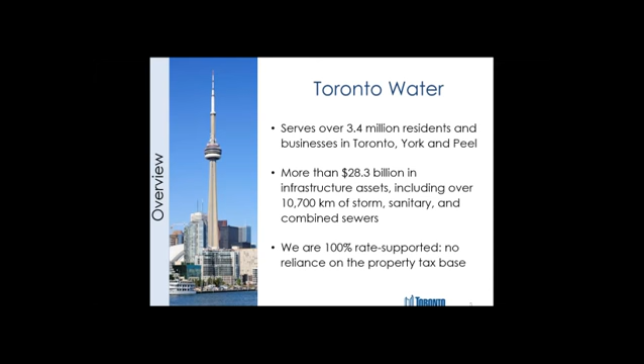Because we're so large, because we're trying to do so many things, that brings in some challenges with competing interests. The city's getting older, so we have an aging infrastructure backlog, what we call our state of good repair backlog, at about $1.6 billion now. We also have a lot of growth in the City of Toronto, so how do we upgrade our systems to handle population growth? We have increasing environmental goals around water quality, our rivers, our lakes, and for our residents. And we also have climate change as a factor influencing our decisions and the level of urban flooding.

So I want to jump into why did we create the Basement Flooding Protection Program, and I think that's an important question when we look at ourselves as a city. Why do we have that? It really comes down to we've had a number of large storms over the last 15 or so years, and the magnitude of those storms created enough impacts that now we have an interest in improving our systems so that our residents and businesses have fewer impacts.

It really started more or less around May 12, 2000. We had a storm event then, a big storm event. It wasn't bigger than the more recent ones, but it was the start of the change for us to spend more money on resolving the problem and also trying to change our service standards, moving from the way we used to build things to a bigger standard for better risk reduction.

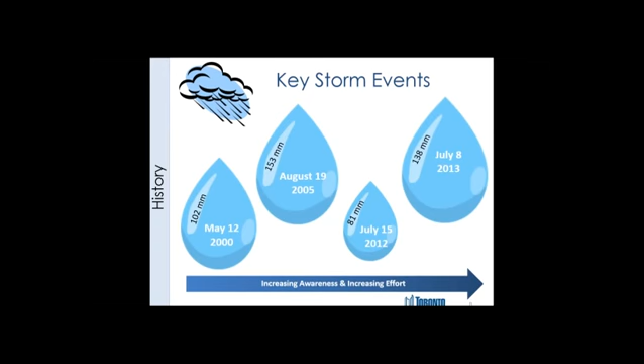I'll go a little bit over just very quickly what the storm events were. May 12, 2000 was spread out a little bit more over the city, a little bit greater intensity in the north half, perhaps a little bit west of Yonge. We felt some impacts a little bit greater on that side of the city, but there were a fair number of basement floodings, so that started our current program.

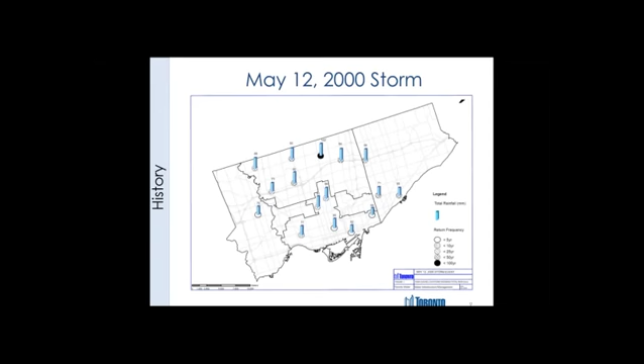August 19th, 2005 is really where we created a staff report to council, and we came up with the title Basement Flooding Protection Program. It was a tremendous storm. We had flash floods of rivers, ravines and watercourses. Stream banks overflowed, and that had a lot of impacts to residents and to transportation. We had lots of erosion along our watercourses, lots of damage to public and private property, and we had lots of sewer backups.

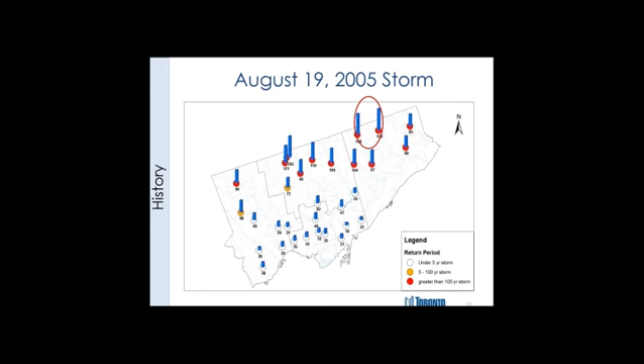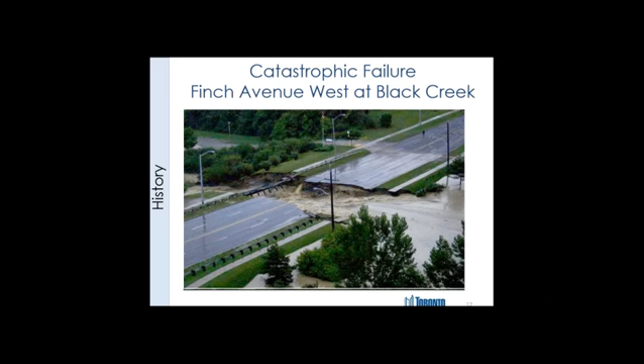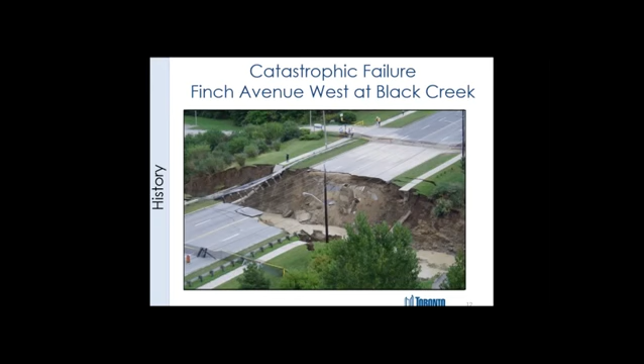One of the pictures probably many of you have seen is a catastrophic failure at Finch Avenue. I have a few different pictures as the event is happening and washing away Finch Avenue and the infrastructure, losing a fair amount of infrastructure under the road with it as well. That failure took a long time to repair, so that was a driver for us as a city: how do we better manage our infrastructure so that we can ensure transportation systems even during a large storm event?

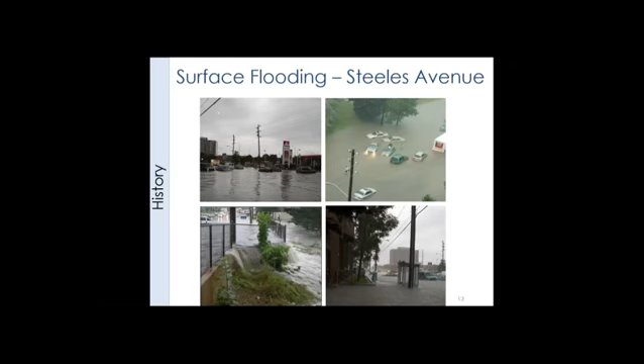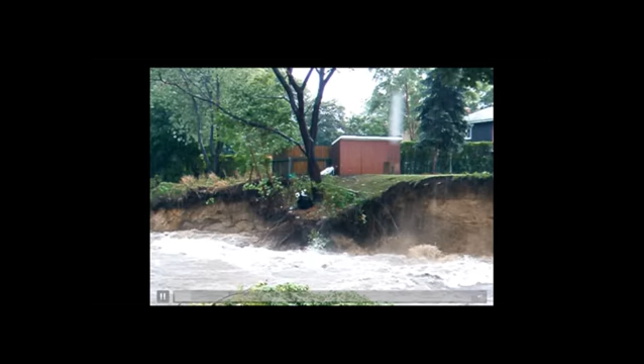Holy crap! Oh, that was worth the wait! Did you see that? Oh, so it's barbecue with the deers! Oh, what are you gonna do for Christmas?

I'm not sure why he's talking about Christmas, but what happens there is that's somebody's backyard, a tree in someone's backyard being washed into the water course into the ravine. So it's definitely a big issue for our residents and businesses.

In most cases, thankfully, it's been backyards and not buildings. But in the worst case scenario, that can approach the buildings.

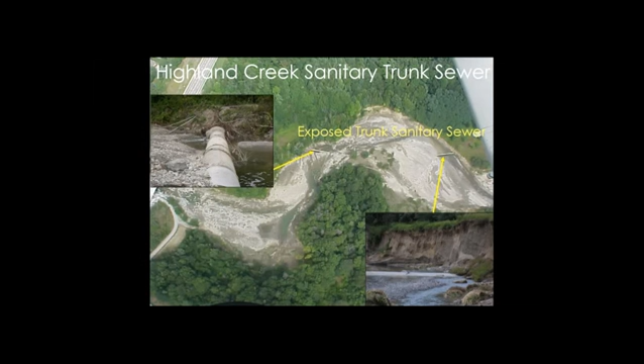On August 19th, 2005, we had one of our major trunk sewers, the Highland Creek sanitary trunk sewer, lost in that storm event. Water levels in Highland Creek rose dramatically. Downstream at the treatment plant, they started noticing tree trunks and other large items showing up. Because of the water levels in Highland Creek, it was a couple days before we were able to find where the break was, once the water course levels dropped.

So that ended up requiring emergency repairs. We basically created a channel where the sewer used to be, and the sewage flowed in the open until we could install a new pipe. That's a tremendous health impact in terms of sewage flowing in the water course for quite a while.

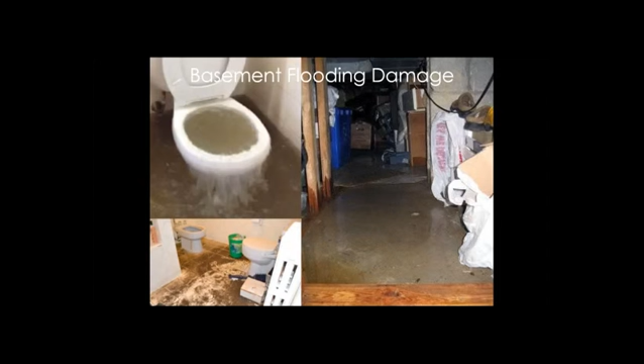So we have our traditional toilet overflowing picture, basement flooding damages, which unfortunately happens during these large storm events. This is a snapshot of the basement flooding complaints that the city receives through its 311 call center following that storm event. You can see the black dots primarily north of the 401, some south, but that really is where we felt the impact.

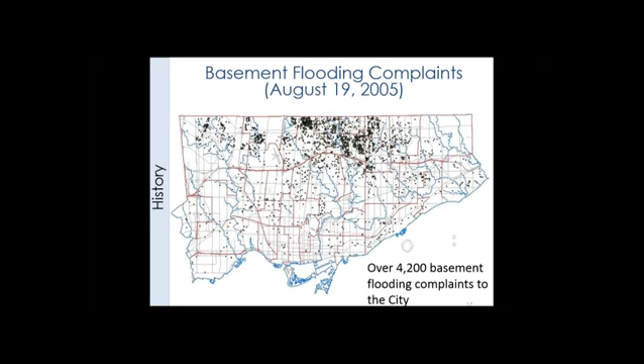Another thing in this storm event versus the 2005 storm event, we lost one of the transformer stations. It was down for a while, so we had over 300,000 properties without power. What we had was flooding during the storm event itself, but then also flooding 12 or more hours later as the water basically seeped into the basements. So a little bit different flooding, but still damage.

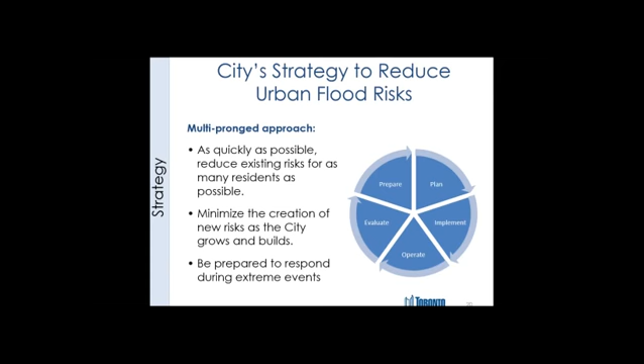Using that same circle from the previous slide, this follows an asset management life cycle approach, starting with planning near the top and working our way around: planning, implementing, operating, evaluating, and then preparing for next time. What I've put on the slide in black on the outside is how the various parts of our program fit into those phases of asset management.

Under planning, we're doing capacity studies, trying to understand our system better and understand those bottlenecks so we can work on them. We have project prioritization—it's going to be really costly for us to build everything, and it's going to take time, so how do we choose which projects we do first? And we have policy development, which could be anything from our design standards to zoning bylaws—a whole package of things we need to plan for the long term.

On implementing, now we're into construction—one example would be bigger sewers to manage that water better. We also have subsidy programs to encourage homeowners to do some implementation on their side of the property line. And we have a downspout disconnection bylaw, which changes something on the private side as well.

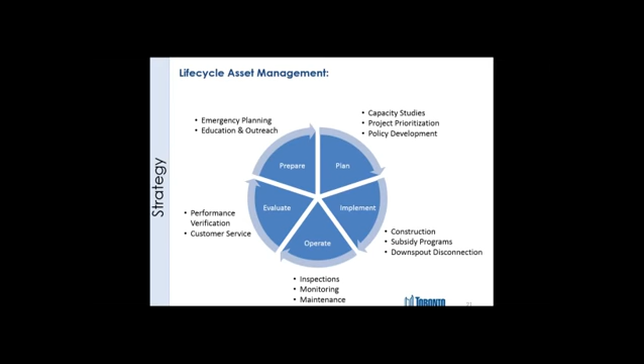So infrastructure upgrades is what I'll talk about first. We really started that framework in the program in 2006, with capacity studies done on a focused portion of the city based on how storm events hit us before. But in 2013, we wanted to stop chasing the storms and have a citywide approach, so the program expanded citywide. Now our goal is infrastructure upgrades or service improvements across the whole city.

It's a multi-year program—it's going to take us many years to do all the parts. The capacity studies are following the municipal class EA process, and there's a few reasons we do that. Number one, we really want to engage with the public—we get a lot of information from them when we do, and it really helps us focus our solutions.

And the big part is the enhanced design standards that we have. We still have the May 2000 storm standard, introduced after the May 2000 storm, for the sanitary sewer system. And on the storm drainage systems, which include the combined sewer systems as well, we're aiming towards the 100-year storm event design standard.

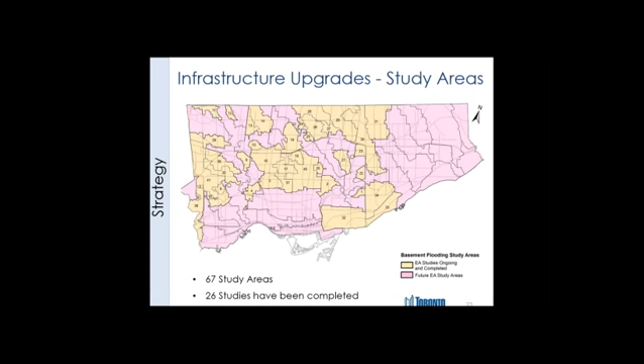Jumping into the capacity assessments is really our first step in that process. We're using InfoWorks modeling to model the surface flows and the underground flows, so we're modeling the storm systems and the sanitary systems, and we're doing it in a very detailed way - manhole to manhole, catch basin to catch basin, trying to understand where our bottlenecks are in a neighborhood, either in the sewer systems or on the road surface. To make sure we understand all of that correctly, we're calibrating and validating those models. We're calibrating the models with sewer flow monitoring data taken at the beginning step of the study, and then we're validating using all the calls that come in to us. We've even added another point where, when we do the studies, we have questionnaires filled out by residents. We're verifying those facts from the phone calls after rain events to validate our modeling.

Sorry, Dave, to interrupt - we just had a question from somebody online, which might be good for clarification. Could you describe what an EA is, the EA process? Sure.

The EA process, EA standing for Environmental Assessment Process, came out through the Municipal Engineers Association. It sets a framework whereby if you want to analyze a system and recommend improvements to it, it creates a process with an order of steps where you consult with the public at a number of points in time, and it has some rules about how you document that process. It gives the public an opportunity through public meetings to comment on what you're doing, and through the documentation, it gives the public an opportunity to review it.

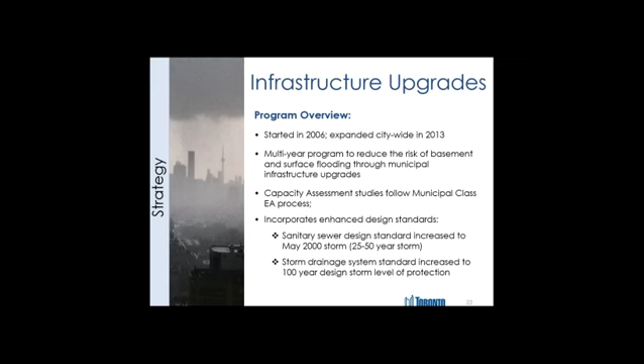So fast forward - I have another slide on the capacity assessment here. One of the challenges with the detailed approach is each study takes 2 to 3 years to complete. We're building models that we didn't have before, there's some field verification, there's some flow monitoring - that takes time, the public process takes some time, the documentation takes time, so we're at 2 to 3 years. We feel it's worthwhile because it allows us to identify on a sewer-by-sewer basis changes that we might want to make.

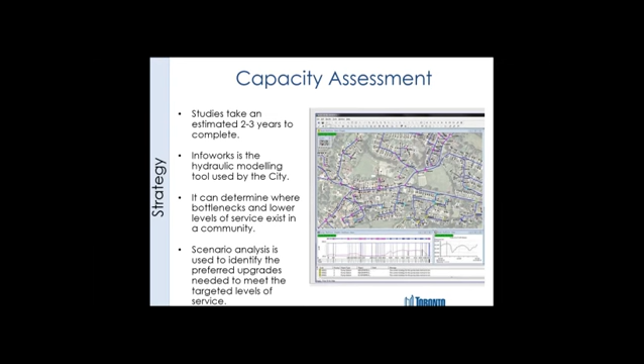And what we also do, on the last bullet there, is we can run a bunch of different scenarios. So we can run different storm events, but we can also run different types of upgrades to that neighborhood, see how that benefits the neighborhood, and that really helps us choose the best solution.

So we do these studies, we do the scenario analysis, we come up with a bunch of preferred recommendations to resolve - I'll just loosely say - the bottlenecks in our system. And what we end up with is a long list of projects, some very expensive, some cheaper, and we need to figure out a way to prioritize them. The way we've come to this is on a yearly basis, we report to City Council as part of the Toronto Water budget process what our 5-year list of projects is planned to be. We prioritize our efforts through a couple of principles, highlighted in blue on this slide.

So number one, the study principle. This is when we do those EA studies, those capacity assessment studies - we study the city in order of decreasing density of flooding complaints.

So we have 67 study areas. How do we decide which study area to do next? We do it based on the number of phone calls we've received from residents across the spectrum of storm events. It's not from one storm event. We've taken all the calls we've gotten since 2000 on any storm event greater than a 25-year return period. So if you have a home that flooded several times, the density of flooding in that neighborhood increases, and hence we study that first.

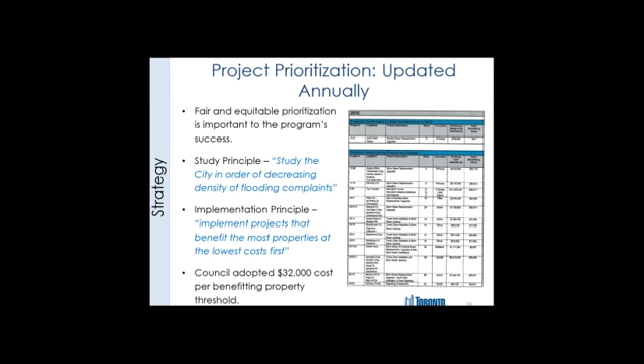So a few pictures of the work we've been doing. Construction works started for us in 2009 under this program. This is a residential neighborhood in North York, a 3.6 meter wide box culvert. In order to fit that under the road, nobody's driving to their house while we're working, so we have to arrange parking nearby. It's quite disruptive, but it also shows there are physical limits to how big a sewer we can put under the ground. That's probably one challenge I'll highlight later.

So to date, we've spent $237 million since the end of 2009 in infrastructure upgrades, and that's to the end of 2015.

Some other images: in terms of that sewer where the two people are standing, that's a 2.7 meter diameter storm sewer that went into one residential neighborhood. That one project alone was about $30 million.

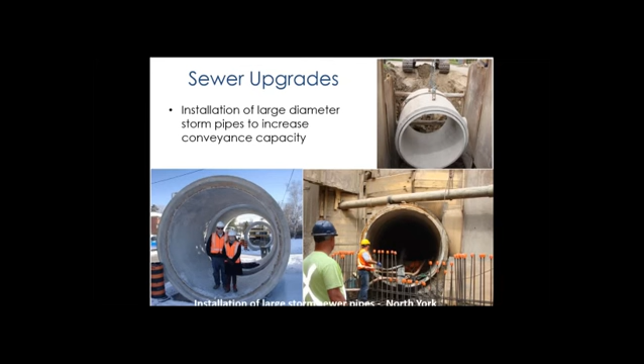We've built a tank in Old Sheppard Park. It sits underneath the park, and the part I always find humorous is we also built a toboggan hill on top of it, because that was the cost of doing business for building in a park. It's a 12,000 cubic meter storm water tank. Once the level in the sewer rises to a certain amount, it flows into this tank, gets held there, and there are a number of sensors in the system. Pumps discharge the tank after the storm event has passed.

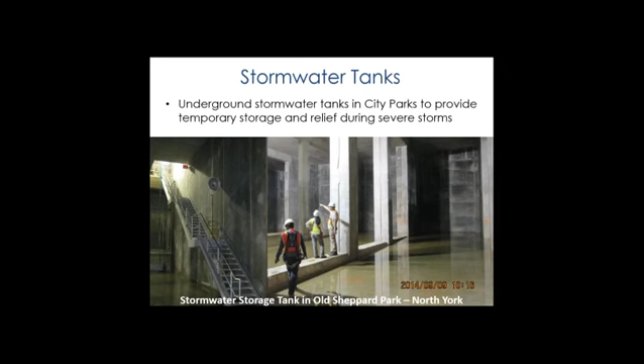We also do surface ponds, primarily in parks. These could be dry ponds - on the bottom picture there are some soccer posts, and it was taken during a rain event so you can see the water in it. That's meant to take those flows before they get into somebody's basement, so it's set at elevations lower than the basements.

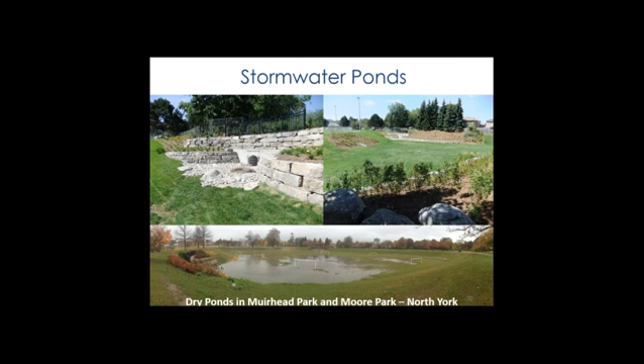I wanted to highlight our watercourse improvements. It's not something we often think about when we think about basement flooding protection, but it is an impact for the city from large storm events. We do a couple of things: a planned approach and an emergency approach. This slide shows a planned approach. We had a bunch of erosion on Humber Creek where the banks of the watercourse were slumping away, which weakens the banks. So through planned works, shown on the right side, we've reworked that watercourse, and now when a storm event comes it should be much more capable of handling larger flows without eroding.

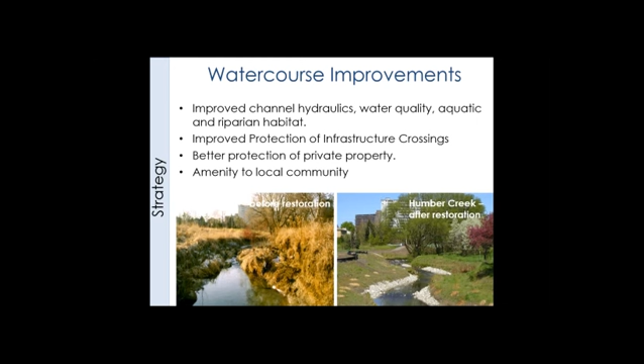Here's a slightly different picture, not as pretty, on the top left - that's a sanitary trunk manhole at what we call Berry Creek. This was discovered through our work with the Toronto and Region Conservation Authority, who inspect all the watercourses throughout the city. They have staff every year walk along the watercourses and document what they find, and we use that with them to build a capital plan to resolve issues. What happened here, and what's happening across the city, is that almost all of the watercourses are down cutting because of the impacts of development on the flow regime. They're down cutting and exposing our infrastructure, so we have to come in and armor it and protect it.

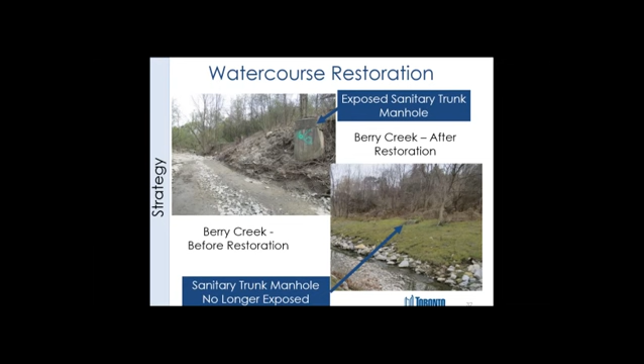That one, a rather wealthy gentleman owns, surprisingly in Toronto, quite a few acres of property that we had to negotiate with to get that.

That's correct. Is it still common to build sanitary sewers underneath watercourses like that, or what's the standard in terms of depth below the bottom of the watercourse?

Every municipality sets its own standards, and I definitely know that the requirements have become much more strict. I joined the city about 6 or 7 years ago. Prior to that, when we built subdivisions, we put them 1.2, 1.5 meters down, maybe we're lucky to get them 2 meters below, but based on the rate of downcutting, that's not sufficient.

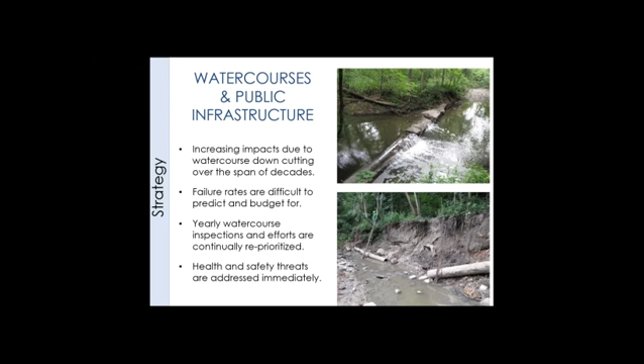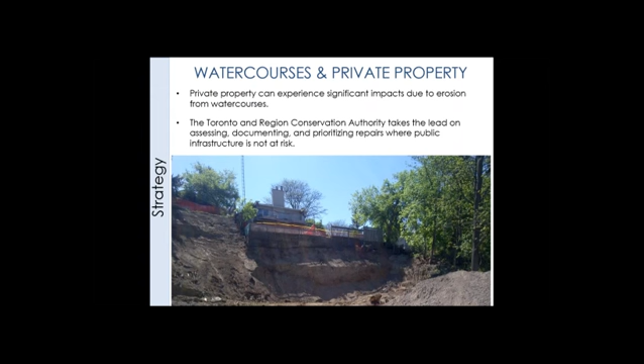So how do we fix them, or how do we encourage the homeowner to fix them, is a big challenge. We always have to go back to what's most important: public health and safety. So where a structure, a house, a building is at risk, we will come in and fix it, but where those risks aren't in place, we have to wait longer, unfortunately.

Sorry to interrupt again, so that $32,000 threshold per property, is that also factored in for erosion protection, or is that separate? It is not. We deal with our watercourse erosion through a separate budget process.

The catch with it is, and I'll get to the money on the infrastructure side, but I'll quickly highlight infrastructure money: we're trying to get to 160 million in expenditures per year. Watercourse erosion, we're at 7 million. So there's quite a different magnitude.

What we try to do is, where private property is involved, we have a policy to share that cost with the private property owner. If we're not sharing the cost, we'll only do the work if that land is transferred into public ownership, so we can maintain and watch those over time.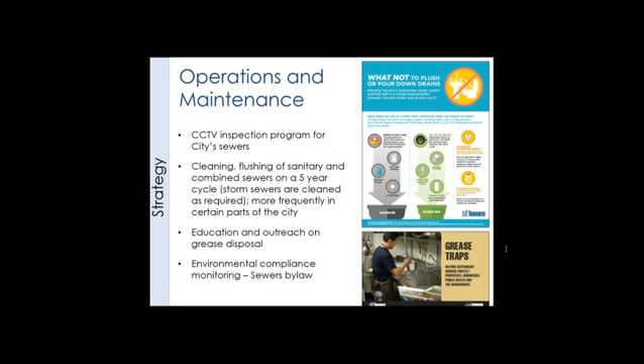So in the City of Toronto, we also have this issue between public and private property. It's very easy for Toronto Water to fix its sewers. It's much harder for Toronto Water to fix somebody else's sewers. So how do we do that? We have this incentive program to try and encourage homeowners to upgrade their systems or watch their systems on their side, and we're trying to cover a lot of the cost of that to try and make it easy to do that. That speaks towards our private property incentives.

So we have up to $3,400 per property for things such as a backwater valve, so a maximum of $1,250 to install that for your sanitary connection. To install a sump pump, we have $1,750. So the primary goal there is you're taking your foundation drainage and ideally discharging it to the surface where it can infiltrate and reduce the load on the sewer system. And the sump pump really goes with the third bullet, disconnection of a home's foundation drains from the sewer system. Those two together work best.

So far, over 16,500 applications have been processed, and we've paid out over $27 million in subsidies to homeowners. Interesting things about that: every storm event, our application rate increases. It drops off a little bit after the storm event, but if we look 6, 8 months or a year after the storm event, our application rate is always greater than before. So it goes up and it doesn't really come back down.

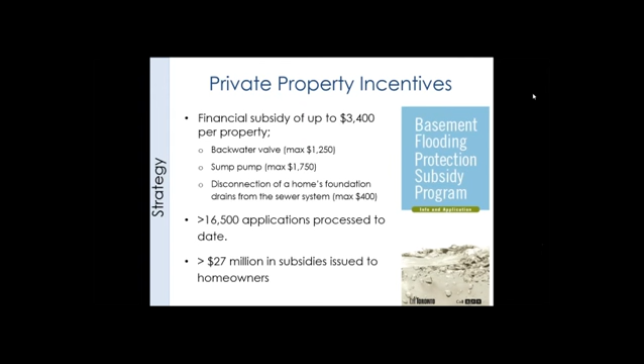So on our next slide, we have our mandatory downspout disconnection program. This is a bylaw being phased in across the city, with three aspects ranging from November 20th, 2011 to December 3rd, 2016. That speaks to different types of properties: one in the combined sewer area, one in what we call basement flooding areas, which has now been expanded to the whole city.

The third is for properties outside the basement flooding area and combined sewer service area, and that's the end of this year. We're hoping to get those disconnections because many homes had their foundation drain systems and downspouts draining into our sanitary system. If we get rid of that roof drainage, that's a huge benefit even if we're not changing a pipe on our system.

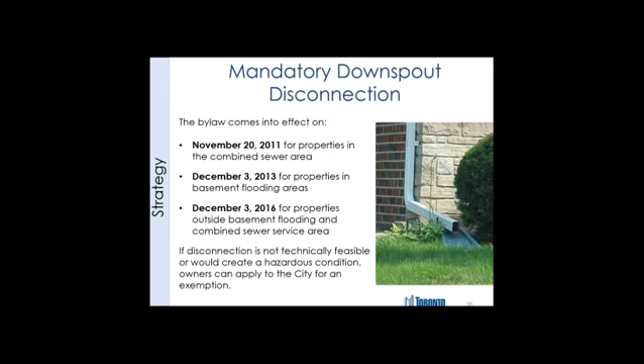Moving on with bylaws, we try to work with other divisions to influence how new developments or new properties are built in the city. The first part here are citywide zoning bylaws, through our planning division.

Reverse slope driveways - there's a lot of them in the city. We don't build as many anymore. Unfortunately, there's still the odd one that gets built because there are ways around it in the courts and whatnot, but through that bylaw, they're no longer permitted because that's a big risk factor.

The other one I highlighted was maximum lot coverage values. I can see that being a little bit weak at times, but it's important when we link it with our downspout disconnection program. If you don't have a yard to send your downspouts to, ultimately it's still going to come back into the sewer system. So that lot coverage is important as well.

We have our sewers bylaw, which is the second bullet there, which says no new connections to storm sewers from private property. That's our blanket approach - that's what we expect from developments.

There is a process by which, for various physical reasons, there is no place on the surface to send the water - for example, it might create ice across the sidewalk - whereby you can still connect to the sewer system, but that process is a bit long-winded, for obvious reasons.

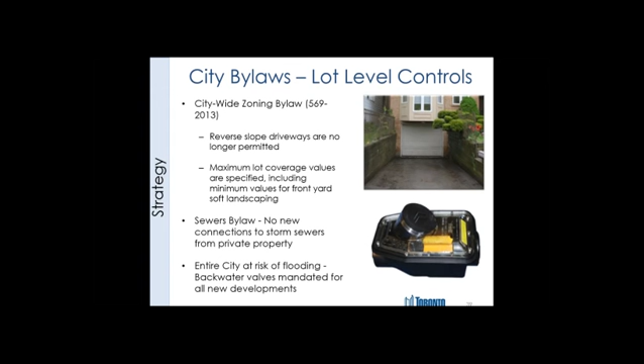Our education outreach program grows every year, and it's multi-pronged. We have advertisement campaigns - print ads in local and bigger newspapers, targeted web ads that show up on various sites, and posters in TTC shelters. The poster shown there is one we had put up in TTC shelters in the past.

We have brochures - our latest one called Managing Water Around the House from A to Z. That's really an education piece, explaining a lot of things about a person's home and how they're connected. We hand those out at every opportunity we can, like public meetings.

We have our City of Toronto website where we have information about what we're doing and our programs. We also do a social media campaign - for example, in the fall we'll tweet reminders like don't forget to clean the leaves out of your eaves trough, or please call us if there's leaves on your catch basin grates on the street. Little reminders to get people thinking about it.

And construction notices - when we're working in a neighborhood, everybody gets two notices: a public notice maybe one to two months ahead of construction, and a second notice two weeks ahead. These are great opportunities for us to tell them about everything, even lead water service replacement, which we bundle into basement flooding work.

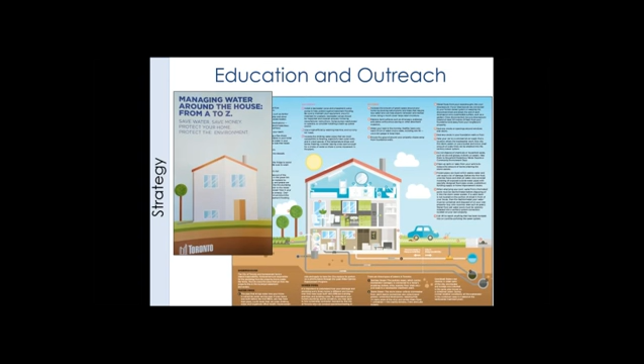This gentleman's name is Shaka. He's been our field ambassador since day one, since 2009, and he's still a field ambassador for us. It was an experiment we tried - basically we hire a contractor to go build things, and there's a lot of disruption, and sometimes residents get upset. There's a phone number on a board, but it's not the most helpful. Shaka goes out and knocks on every door, so he's a bridge for us in managing all deficiencies on the site. It has tremendously reduced the number of calls, complaints, and issues we've had on our construction sites because he can deal with it right on site. That's one really big thing for us in working with the community that's been a success.

We have construction notices and signage. The blue sign in the middle is the sign you'll see around our construction projects. On select projects, we'll have community meetings. For example, if we're doing something in a park, we're going to have a community meeting because that impacts a lot of people. We're less likely to have a community meeting if we're putting in a storm sewer under a road. There's less to talk about in a sense.

I mentioned the Toboggan Hill earlier. That came out of a community meeting for that project. The park started out flat. It's made out of styrofoam. When we built the tank, it was designed for a certain load of soil on top. We couldn't build a hill of soil on top without redesigning the tank. But if the core of the hill is made out of styrofoam and it has 1.5 meters of soil on top, it made it a lot lighter. We didn't have to redesign the tank.

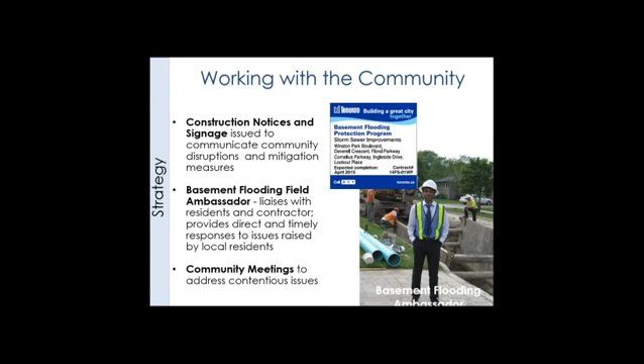People always say, I go to these community meetings and you don't do anything. That's the example I use. Actually, a lot of grandparents lived in the area, and they said the hill they needed was a short hill for 3-year-olds, and that's what they wanted, so that's what they got. So we do listen.

So I want to talk to you about what's new in the program, what's changed over the last few years. So just a highlight: I have bigger goals, so I want to do more. I have more resources, improved coordination, improved calibration and validation, and more experience.

It was really the 2013 storm that made the change for us. That's where council said more, faster. So we're trying to get to 160 million of construction money in about 3 or 4 years' time. We're currently at about 60 million a year now.

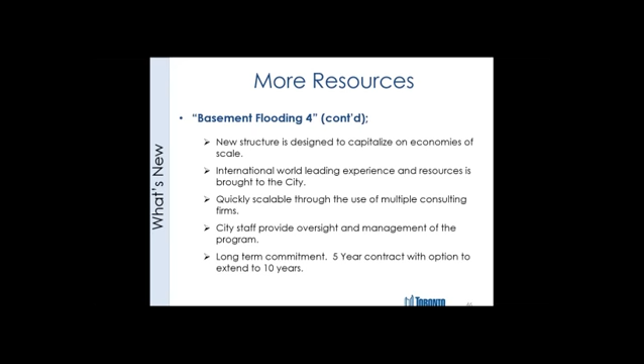I wanted to highlight improved coordination. There are a number of little gaps in the city. One gap that would exist is a homeowner has their backyard always being wet. Some people will quickly say that's a private property issue. However, there's an expectation that the city is there to do something to help with that, even if it's just advice.

So City Council said, all right, all of you divisions, we need a committee, we need you talking amongst each other. Membership includes city planning, engineering and construction services, municipal licensing and standards—MLS. They tend to be the group that deals with a lot of these private property issues, but they need better tools to give better solutions. And they can only do that by working with the rest of us to fill in all the gaps that we might have between our groups.

So we do need to report back to City Council, and there are a number of items that we're addressing as a group.

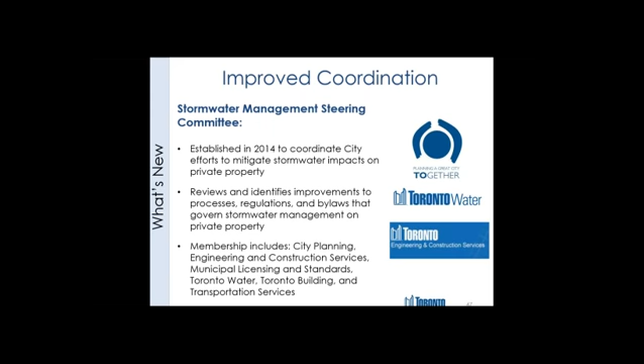Improved calibration and validation—better data equals greater confidence. One of the challenges with the detailed modeling we do is that there are a lot of skeptics. Is that really the right size? Is that really going to solve the problem for those new sewers? So the only way we can be sure of that is we've increased the amount of flow monitoring we're doing ahead of those capacity assessments.

In the past, we did one contract, hired one person—he did the flow monitoring, the modeling, and the reporting. Now we've split it out, so the flow monitoring is separate. We already have almost a blanket flow monitoring contract, and we're continually doing flow monitoring. Now we're starting the studies as fast as we can and taking that flow monitoring data and handing it over. So instead of 3 or 4 months of data, we're getting 6 months, 8 months, a year or more of data, which gives us more confidence.

The other component is, we've built something—how can we be sure that it worked? So in select neighborhoods, we're putting in monitors afterwards, and we'll keep them in as long as we need to, until we get that storm event that proves to us, by comparing with the model, that we've achieved what we want to. If we haven't achieved what we want to, then at least we can come in and try to fix the problem before that big storm event hits. And we have other problems.

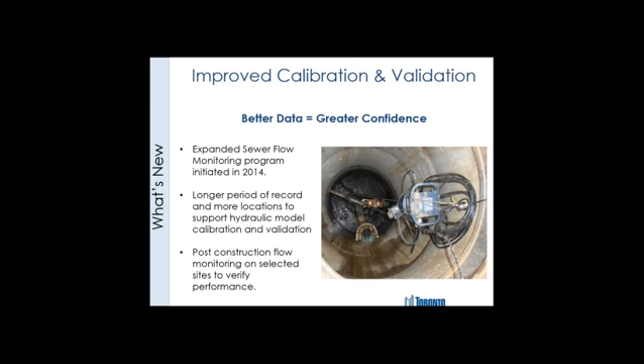So I want to tell a little bit of a story. So, $237 million construction upgrade so far. And for the most part, it's worked really well.

However, this is a neighborhood where we upgraded the sewers in 2012. We spent over $30 million upgrading the sewers in that neighborhood. And then on August 1st and August 4th, in 2014, a number of homes in that community flooded. One of those storm events was between a 2-year and 5-year storm event. And if you remember, we targeted a 100-year storm event as our level of service. Even the other storm event, while a little bit larger, was still below what we targeted.

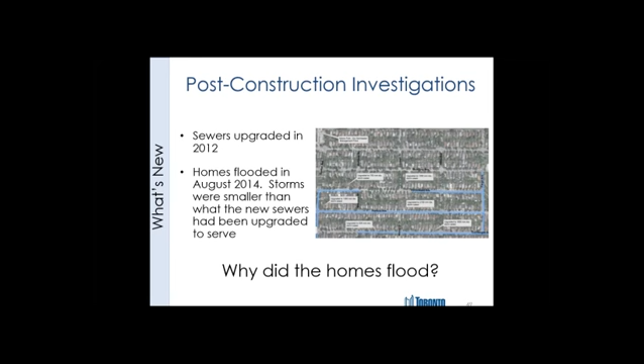So we really scratched our heads. People weren't happy. Councillor wasn't happy. Couldn't understand why it didn't work. So we said, okay, let's forget everything we've assumed, let's throw this model out, let's go to this neighborhood and really find out what happened. It's difficult to do on every neighborhood, so we don't do it on every neighborhood, but we learned a lot from this investigation.

So the first thing we did was we sent a questionnaire out, we blanketed that community - people that flooded and people that didn't flood. So they first got a short questionnaire, which was more or less along the lines of: did you flood, and can we talk to you?

And the people who said yes, we then did either on the phone or we met with them in person, and we filled out a multi-page questionnaire to really drill down into how exactly did that water come in, what did it look like, where did it come from, how much, and also have them describe to us how their house looked in terms of plumbing, what they knew about it. So it really brought us to most of the answers to the questions we had.

We also added in sewer flow monitoring, rainfall monitoring, and groundwater monitoring throughout the neighborhood to also understand, and topographic surveys. We surveyed the basement elevations for the homes that let us.

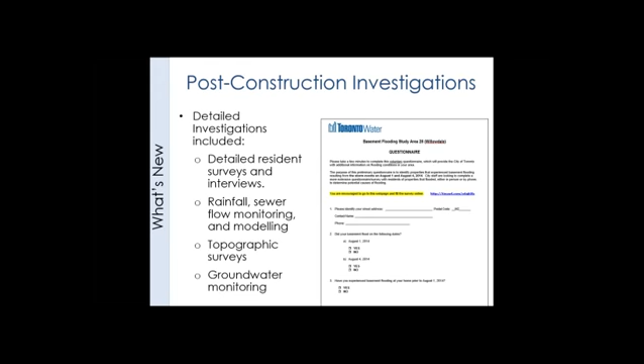So the picture there on the man holding a pipe that's full of mud - believe it or not, that came out of a house that was built in the late 60s. It was an infill house in the neighborhood, so one of my guys happened to be there and he took a picture of it. So you can see how after only 40, 50 years, you can get a lot of sediment in your foundation drainage pipe, and that's what that was.

And so what we believe happened in this neighborhood is that was the dominant problem. These homes were built in the 50s and 60s in this neighborhood, and through our sewer flow monitoring, rainfall monitoring, and other testing, we were able to verify that the water levels in our sewer system didn't rise high enough to flow back towards the homes. But what we believe happened was the water around the homes was unable to get to our sewer system.

And we determined that by looking at groundwater monitoring. So looking back at what happened in August 2014, over that 2-week period there were a bunch of drizzly rain events, and what it had done is we believe it had made the ground wet. Through the groundwater monitoring today, we found that even one rain event, the groundwater responded very quickly. So our conclusion was that groundwater came up, and the foundation drainage systems, because they had lost capacity over time, were unable to drain the water away fast enough. The homeowners reported the basement walls almost being like a sponge, seeped in from everywhere, which is a foundation drainage issue.

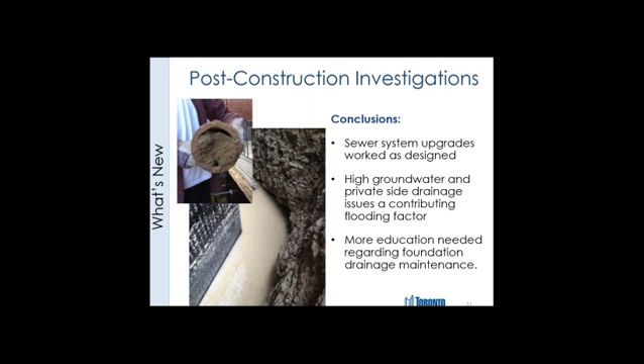So, climate change initiatives - there are a number of things happening in the city on this topic. What I've highlighted here are different things derived from council. We have a Climate Change Action Plan from 2008. There's also a climate adaptation strategy called 'Ahead of the Storm: Preparing Toronto for Climate Change,' also from 2008. We have a Resilient City topic, 'Preparing for Extreme Weather Events,' that started in 2013, and 'Resilient City: Preparing for a Changing Climate' in 2014. These issues impact all divisions in the city, so it's being handled through a multi-divisional approach.

Where they're at now, there's a working group called the Resilient City Working Group, multi-divisional, with three thematic groups: transportation, utilities, and stormwater management. Stormwater management is split into impacts on the downtown core and impacts on other areas of the city. Their goal is to identify the various risks from different types of weather changes, pull that together, and develop some action. There'll be a reporting mechanism back to City Council with findings and recommended next steps. Through the basement flooding program we already have an enhanced service standard for drainage systems - for now we're sticking with that. We don't know what the future holds, but there are things happening.

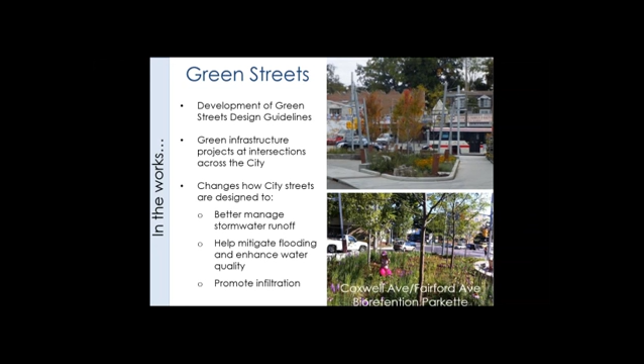We're researching a stormwater charge. Many of you probably heard about stormwater charges in other municipalities. We're in the research phase. It's not meant to bring in more revenue for us, but it's meant to be revenue neutral. It's meant to better link the large producers of stormwater runoff with the cost of managing that runoff. So picture Yorkdale Mall, lots of runoff. Maybe they should pay more than other people. Right now the cost is being borne by how much water you drink.

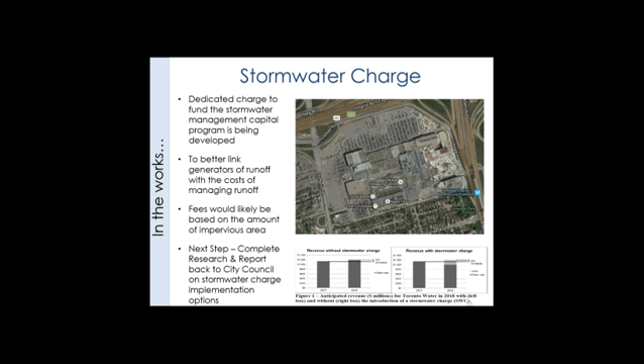So, a couple of pressures and challenges. For us, a big pressure is the difference between public and private responsibilities. There are things happening on private property that are beyond the direct control of the municipality. So how do we reduce the risk of flooding in scenarios like that? That's a challenge for us.

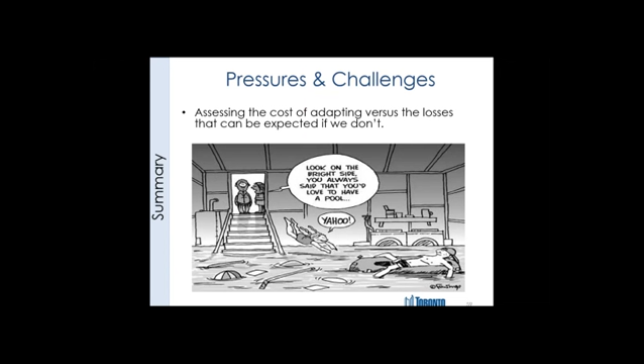So this is a funny little slide. Maybe some people want water in their basement, maybe they want a swimming pool. But we always have to ask ourselves, how far do we go in trying to prevent something from happening? Because there's a cost to that versus the cost you're offsetting.

On a more positive note, we've made tremendous progress. We've gone from basically $0 spent in 2008 on construction - we're at $60 million a year now, and we're approaching $160 million a year. That's tremendous progress. I've got to remember it took over 100 years to build Toronto. It's going to take us decades to replace those systems that took over 100 years to build, to increase that service standard. So that's really about managing expectations.

Several storm events can be expected to test our system before the task is complete. So we always have to have our emergency plans in place, and we have to keep that in mind so that we're always working as fast as we can.

For success, everyone must chip in - the city, property owners, builders and developers, industry and businesses. We can fix the sewers, but we need help on the building side. It's a shared responsibility.

Long-term vision and commitment is needed. The city's done efforts in the past on basement flooding reduction, but they were never large enough, long enough, or comprehensive enough to really fix more than one or two neighborhoods. I think now we've done that - we've signed a contract with a consultant for many, many years, so I think we've demonstrated our commitment.